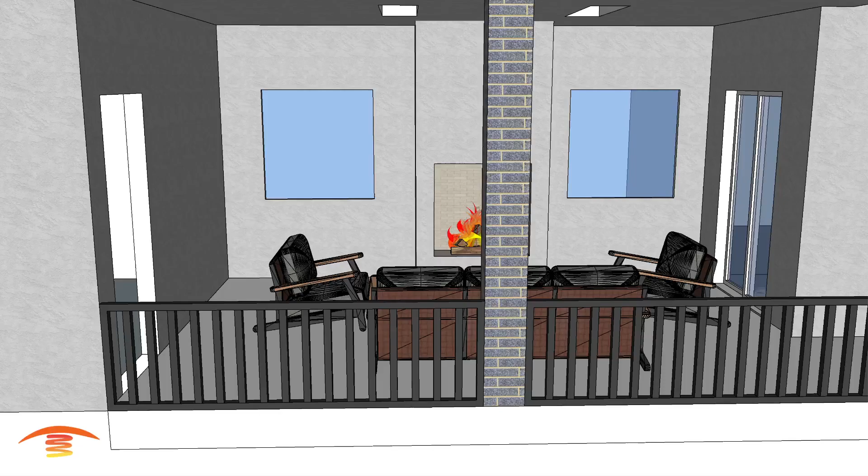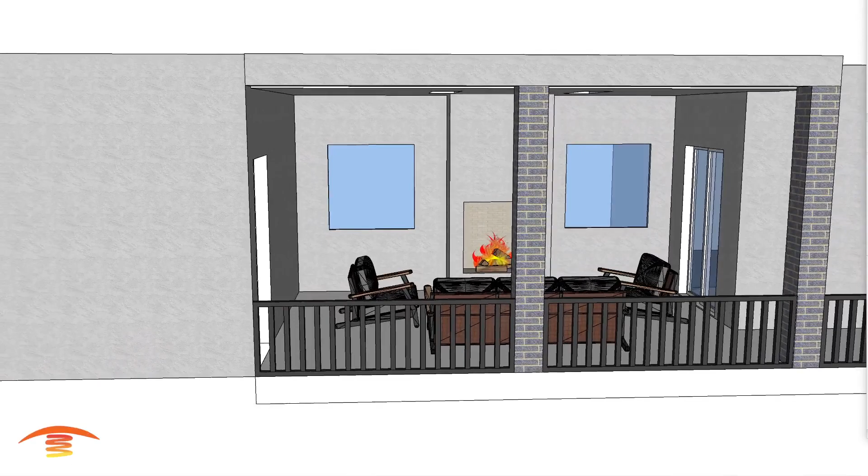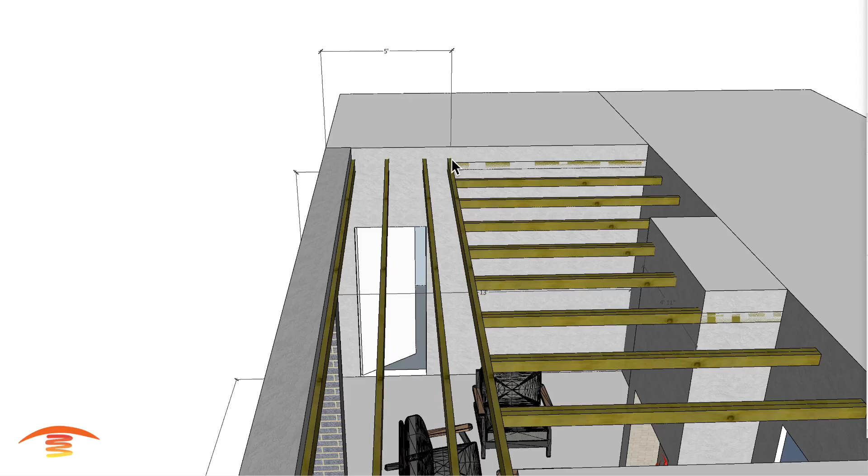Now let's get heating. All right, so here we have this residential application. Let's go right into the overall dimensions. I have here 19 feet wide by about 13-foot depth, a ceiling height of 10 foot off the finished floor, and then there's a structural design up here. I have it at 5 foot to the inside edge of the beams coming across here, and then the other ones are going parallel to that.

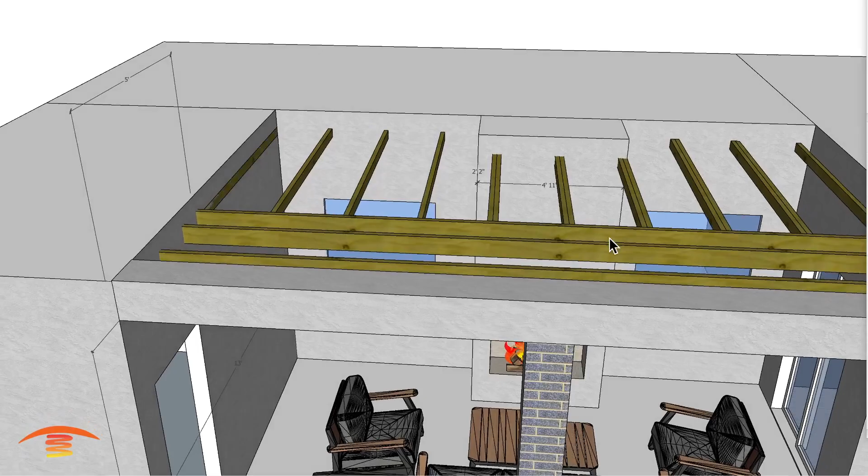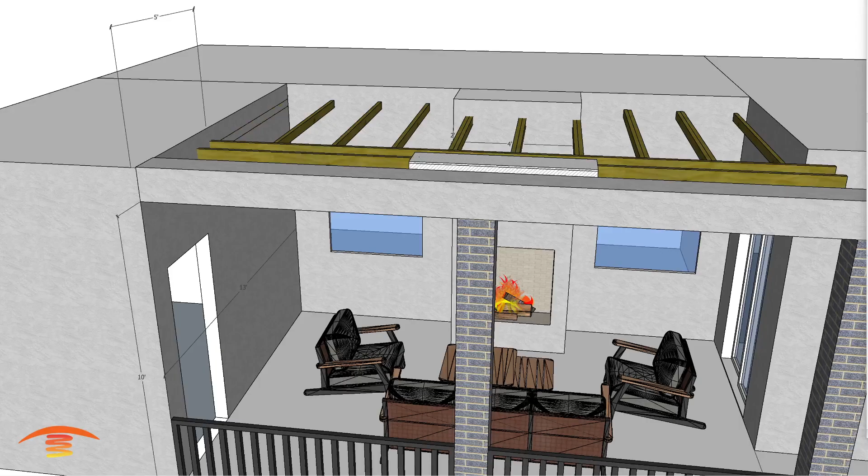Now, I don't have the exact placement, but I tried to copy an image I received with regards to the customer's request here. So you can see I try to mimic what I saw in the image itself. So let's go ahead and place in some 5,000 watt units. Now what I've done here is, because these beams coming across here are at 5 feet, I placed the heaters as close to those as possible.

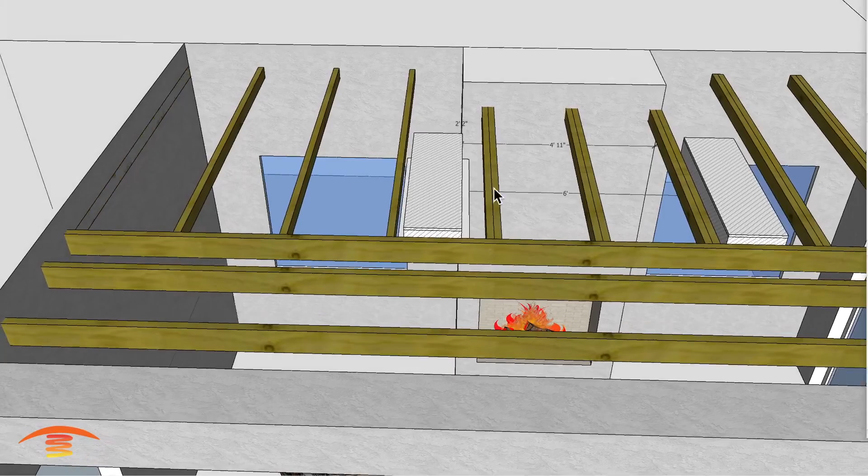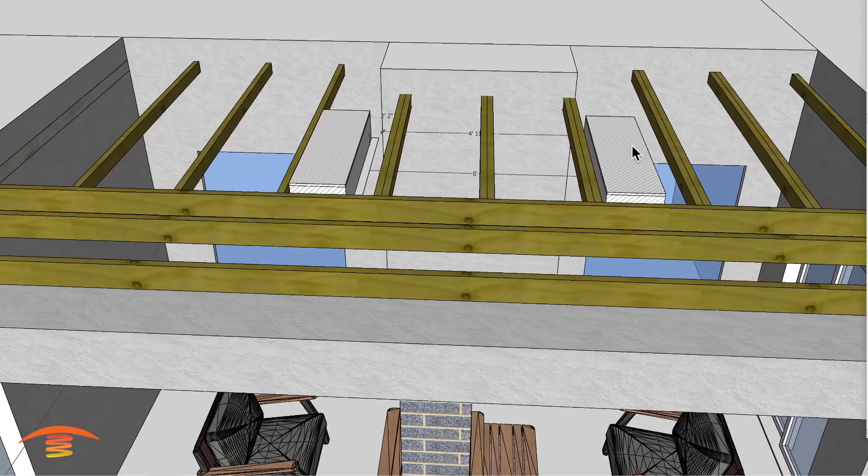Also, I have them at approximately 6 foot center to center on the heater itself, and I have that centered within the fireplace here. So that would be 3 foot center to here, 3 foot center to this unit here. You can see behind the flush mount kit, we have a 7/8 drywall finish that surrounds the flush mount kit itself. We got the flush mount kit here and the patio heater here.

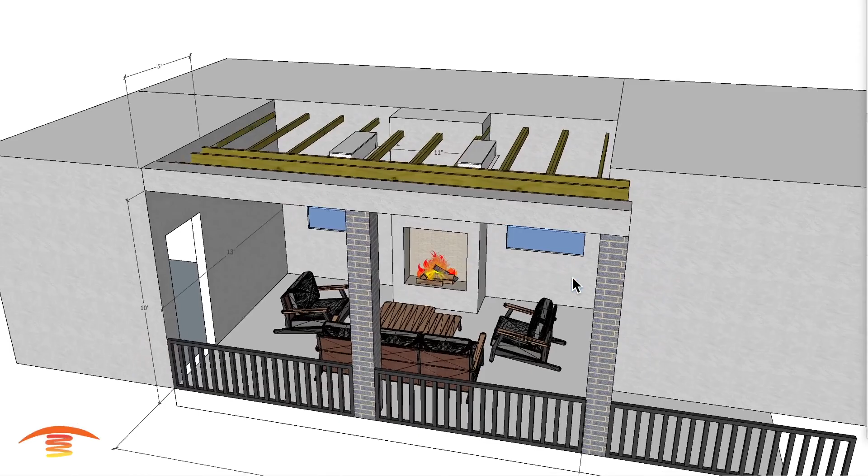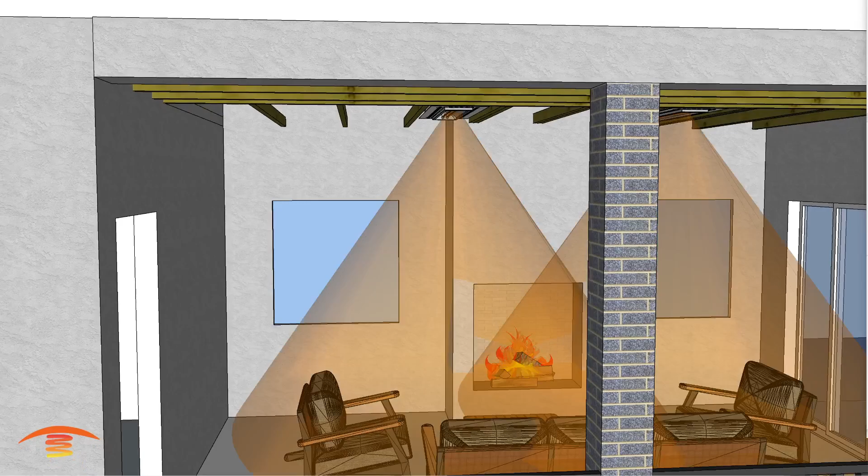I think that's probably about it. I should mention that there are doors here that slide left and right, and then there's a swinging door that goes into the property itself, so there's no problem with regards to that. Let's turn these distances off and look at the footprint of heat. With these units, you can see that we're getting very good coverage with two 5,000 watt units. These are dual elements, 240 volts, and they put out a nice footprint.

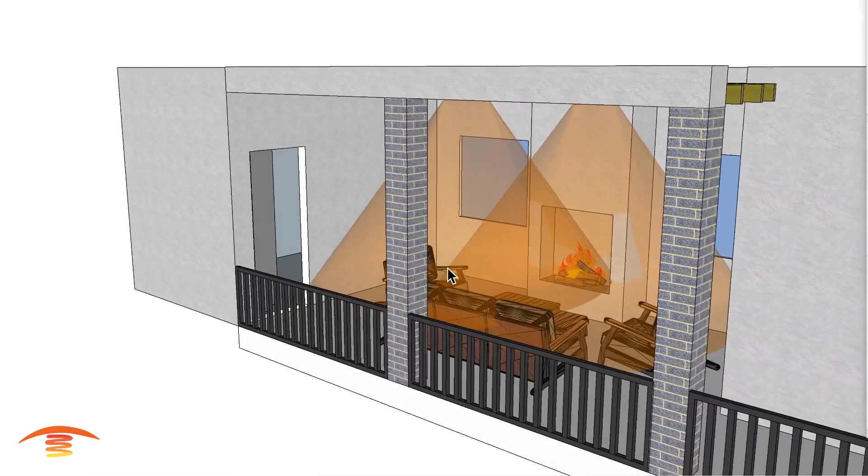We have good cover here, and this application is a very well protected area. We have basically almost 3 walls and a ceiling, so the only exposed side is on this outer edge for the most part. We've got a little bit of opening here. Let's turn that top back on. I do show this as a stucco ceiling.

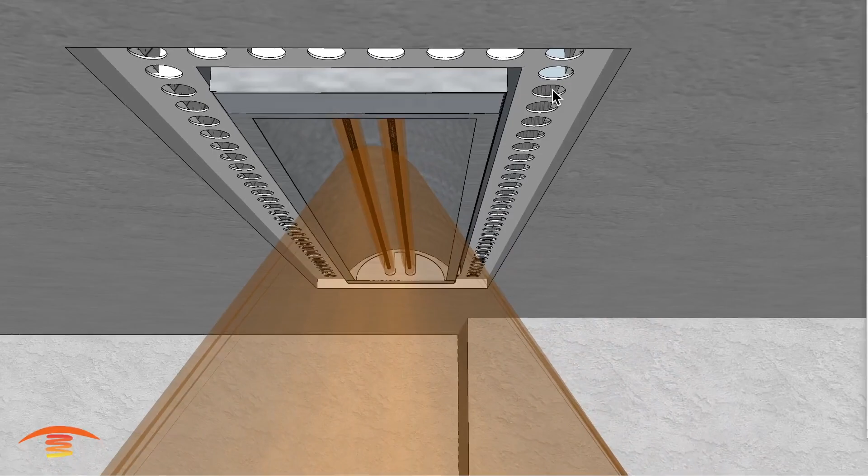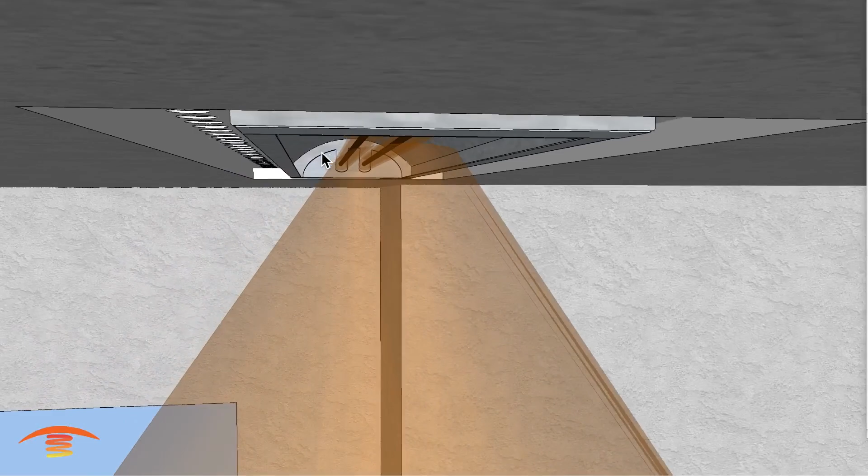You can put the flush mount kit behind a stucco or even a combustible surface. However, in either case, you need to make sure that the vents have at least a 1/2 inch gap between the outer edge of the vent hole and the stucco finish. If the ceiling were wood, the same applies. However, you need to make sure that the heater is at the bottom elevation of that wood surface. So you can do either way. I can move this back up, and it would be at the same elevation for a stucco finish like this.

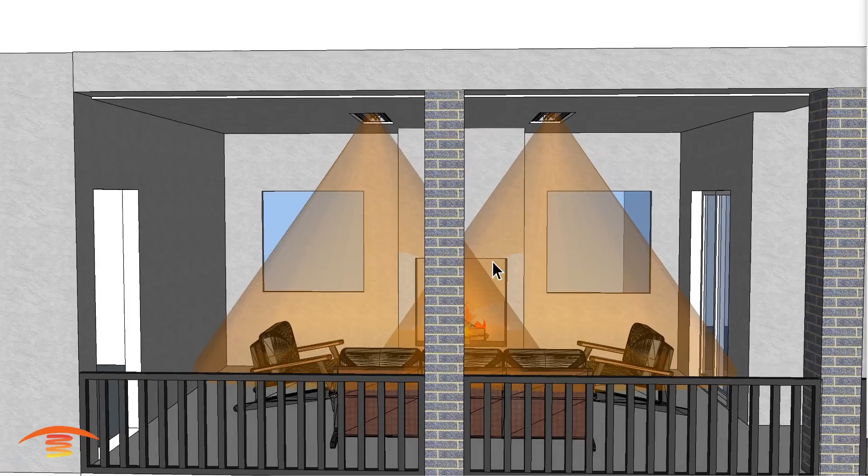The other thing I want to mention is that these heaters state about a 10 by 9 footprint of heat at an 8 foot height. But they say you can put it at a 12 foot height max, and the footprint would be a little less intense, but it would go further down. So imagine this is a light wave, invisible to the human eye, and as it travels through space, it diminishes in its heat output.

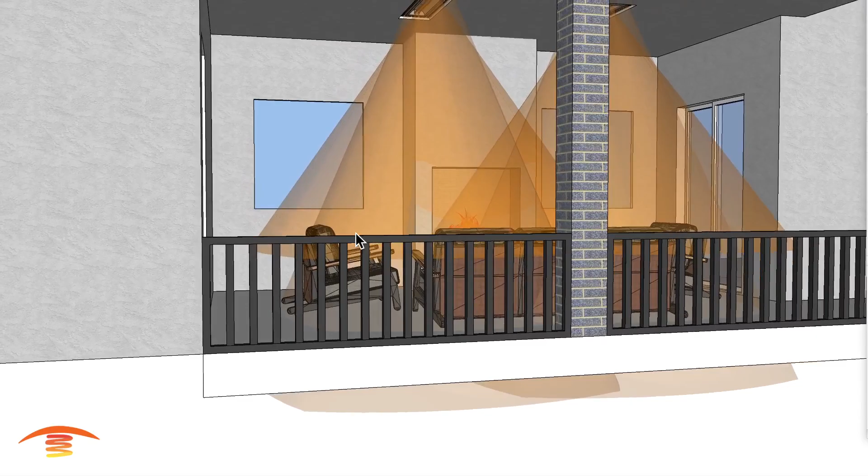So if this heater was truly at 12 feet off the ground, your footprint would be about the same. However, it would not be as intense because it's not as close to you. So this would work out fine in this application, especially due to the well-covered space. I just want to show one other option.

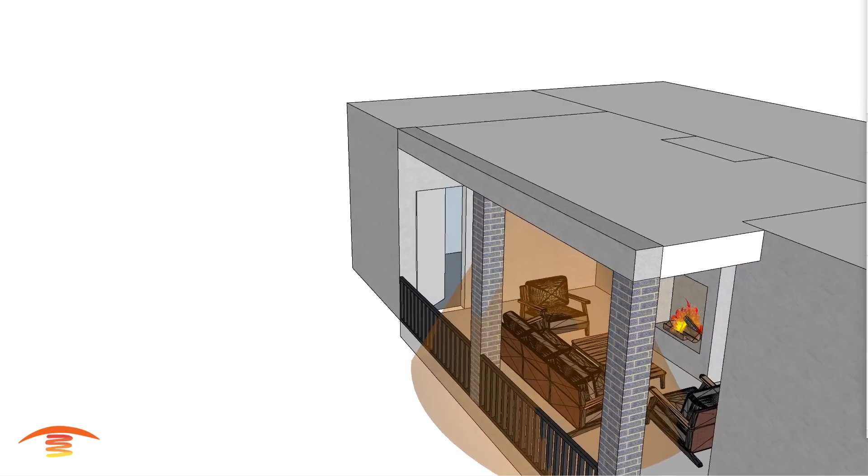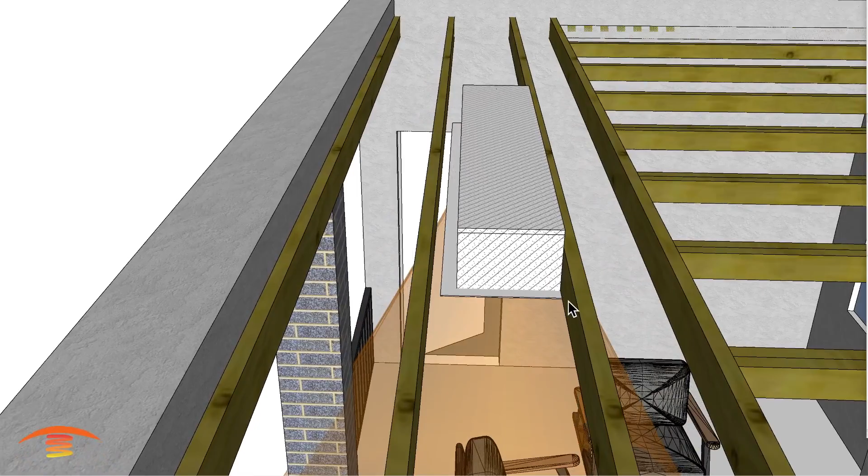That other option being, could we put a 6,000 watt unit in here? Well, yes, we could, if this opening is correct. Let's turn that top off. There was not enough room between the beams as I assumed they're placed, so I placed it against this one to get as close as I could to the inner edge of the patio. However, you can see we're dumping a lot of heat out to an area that may or may not be used.

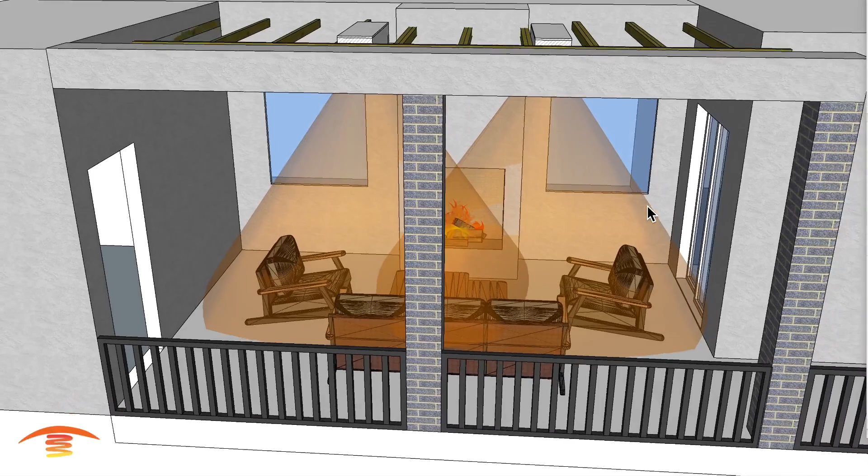And of course, we're not heating up much of this space here. If you were sitting here, you wouldn't feel much of that warmth, and same over here. So this wouldn't be my preferred application. My preferred application would be two of the 5,000 watt units, 6 foot apart from each other. I think this would be the perfect application for this job. I hope this has helped.